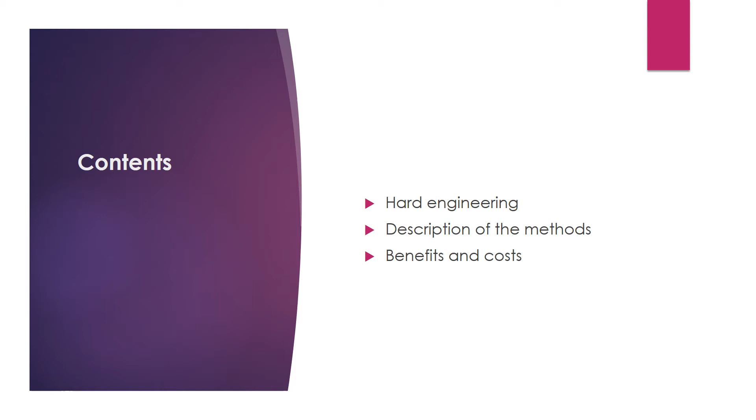Coastal management. So in this video you'll be looking at coastal management and we will be focusing on hard engineering. You'll be looking at the four strategies in detail. So you'll be looking at seawalls, groynes, rock armour and gabions, and you'll be able to describe them and you'll know the benefits and costs of using these strategies.

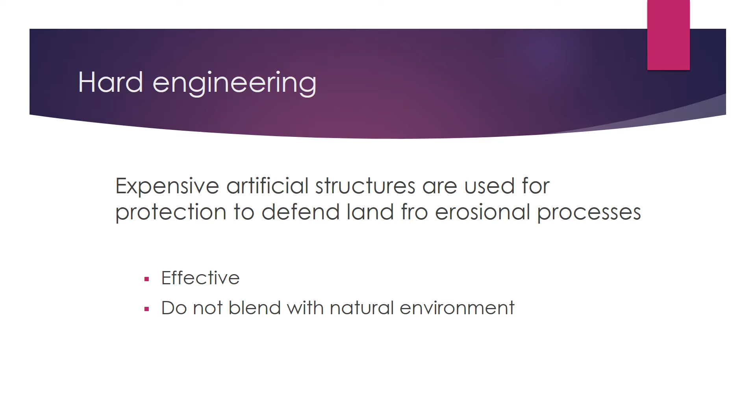So what is hard engineering? Hard engineering is using expensive artificial structures for protection to defend land from erosional processes. These are effective strategies, but they do not blend in with the natural environment. Okay, so let's have a look at our first strategy.

These are seawalls. Seawalls are found at the back of the beach. These are made from concrete and act as a barrier between the land and sea. Some seawalls are flat, whereas some others are recurved. The benefits of a recurved wall compared to a flat wall is that they are more effective at reflecting waves. However, they are also more expensive.

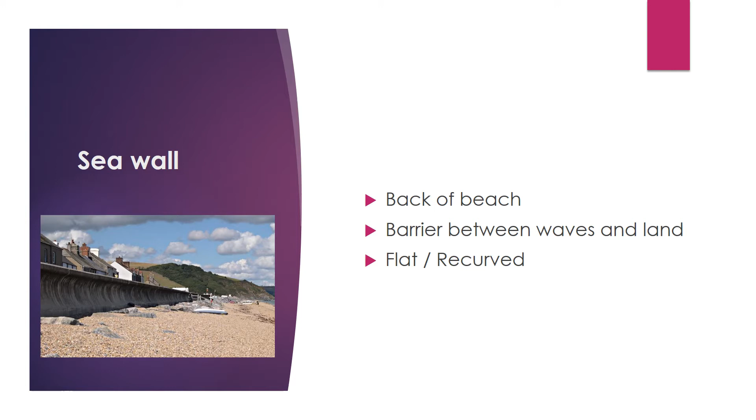Okay, moving on to our next one, groynes. So groynes are wooden or stone structures which run at right angles to the sea. They help to trap sediment which is being transported by longshore drift.

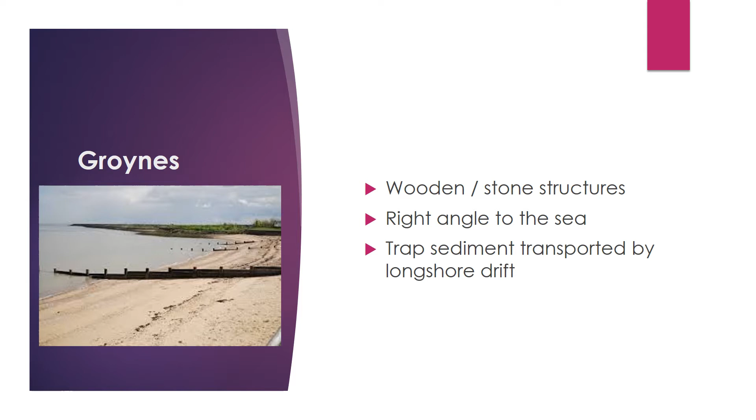Rock armour. This is also known as riprap, and these are huge boulders of resistant rock, so really hard rock. These are often placed at the base of a cliff or seawall to act as a barrier between the sea and land. Gaps can be found between the boulders, allowing the water to enter, which reduces pressure and the energy of the waves, reducing the eroding ability.

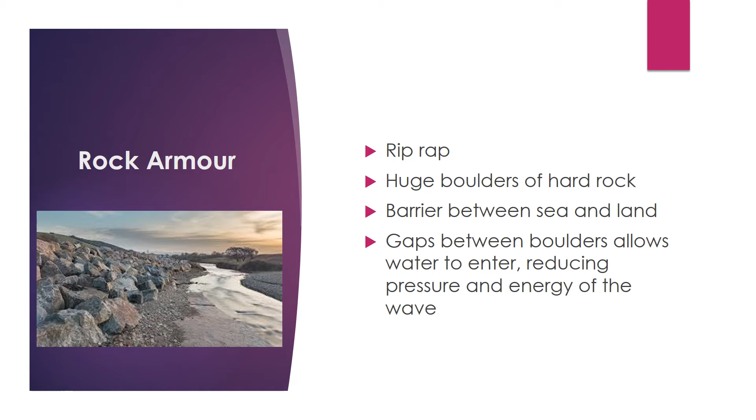So the final type of coastal hard engineering is gabions. These are wire cages filled with rock. They are found at the back of the beach. The cages can absorb and dissipate the wave energy, which reduces the eroding ability. Sometimes these might be covered with vegetation.

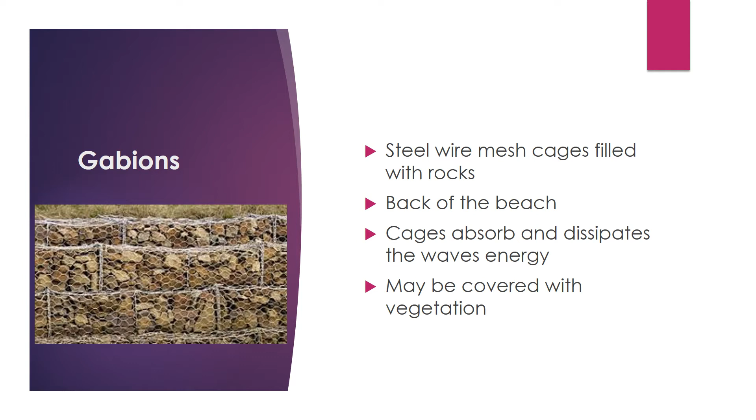Okay, moving on to the benefits and costs of each strategy. So we're going to start with the seawall. So the benefits of the seawall is that they give a sense of security. People living at the coast feel secure that they are protected by the presence of a seawall. The top of the seawall acts as a promenade for walking or cycling. In addition, seawalls have a long lifespan.

However, there are some negatives of using seawalls. Firstly, they are expensive. They cost approximately £5,000 per metre, and they are expensive to repair. As said previously, recurved seawalls are even more expensive than the flat ones. Seawalls can be unsightly. It is just a mass of concrete, and it destroys habitats, especially during their construction.

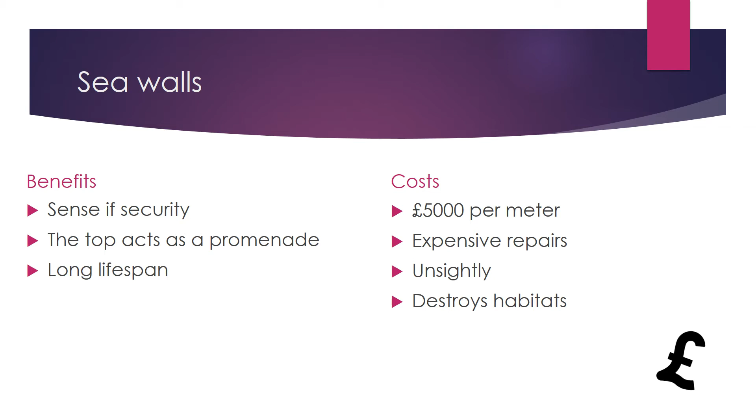Groynes. Groynes are approximately £5,000 each, which is a cheaper option than a seawall. They have a fairly long lifespan of about 40 years. Beach users often use them as a windshield, and they help to increase the size of beaches, which will encourage more tourism and therefore benefit the local economy.

However, they can impede or prevent walking along the beach. You'll need to climb over the groynes to walk the length of the beach. And remember, these go out into the sea, so it's highly unlikely that you'll be able just to walk around them. As a result, they can be dangerous, especially for children, who may hurt themselves if they're climbing over them.

Groynes will need to be maintained. They are unattractive and prevent sediment downdrift. Therefore, people who are living further down the coast will now have the amount of sediment that they receive restricted.

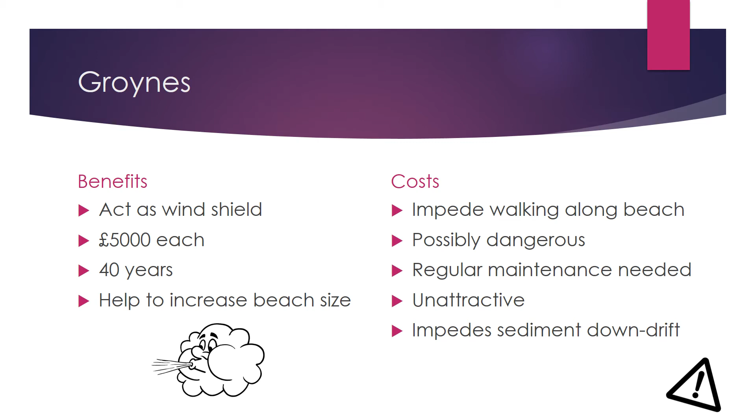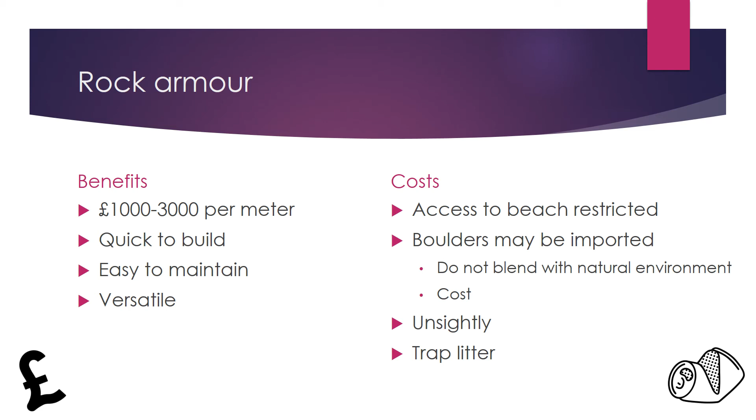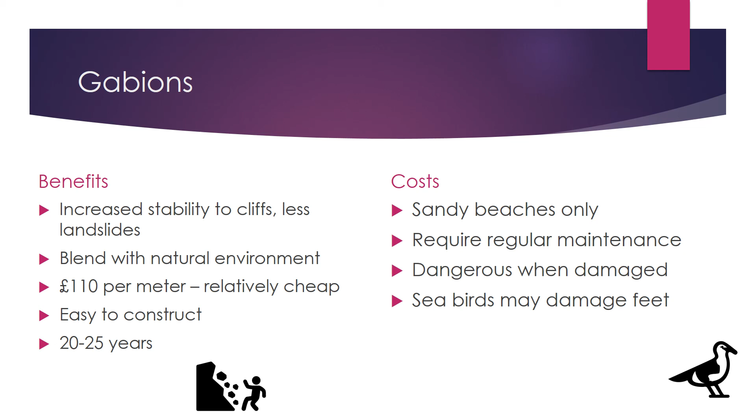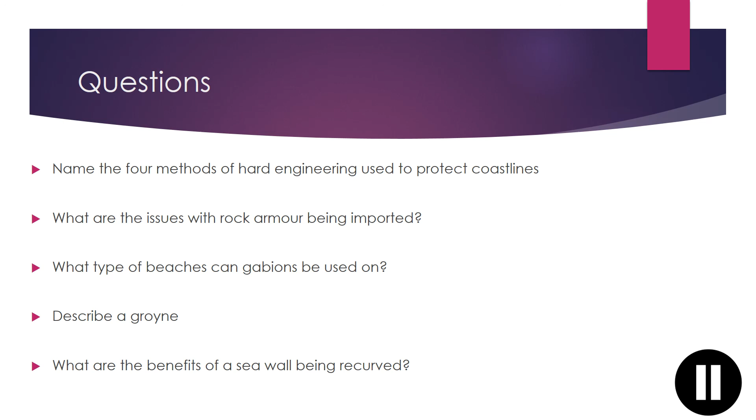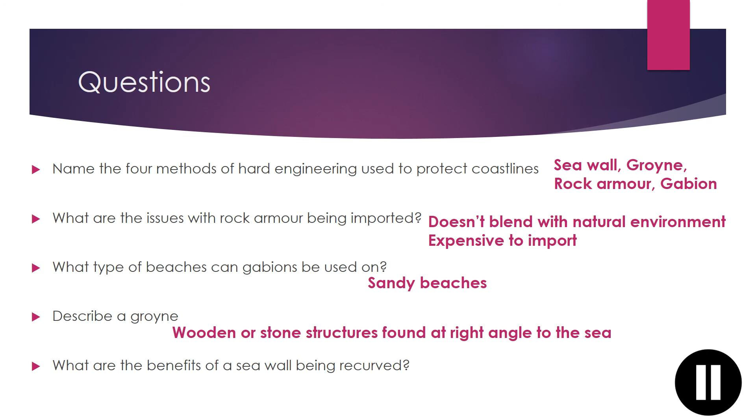So the 4 methods of hard engineering used at the coast are seawalls, rock armour, groynes and gabions. The 2 issues with imported rock armour are the cost and the rock doesn't blend with the natural environment. Gabions can be used on sandy beaches. A groyne is a wooden or stone structure that runs at right angles to the sea. And the benefits of a recurved seawall are that it's more effective at reflecting the wave and reducing overtopping.